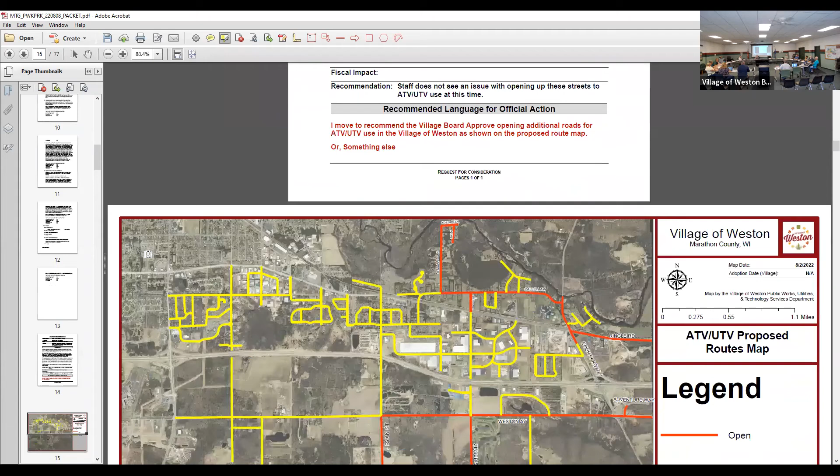So we met with the Rural Riders Club and went through, highlighting parts of the village that they thought would make sense, as well as locations where their club members currently reside. There's a desire to minimize the amount of trailering people would have to do to get to an open road or open trail. I shared this map with Chief Schultz and Captain Aldridge and Rusnick with Everest Metro.

The only real concern currently is, I don't know how to star this, but right now there's no good way to get between Old Costa Lane and Teagan Lane. There is an existing trail there, but it doesn't appear to be on Village of Weston property. So Keith was going to follow up with the individual who owns that land to see if they'd be okay with having it be part of the ATV/UTV trails.

We'd probably have some neighbors in that area to follow up with as well, to make sure they'd be okay with those types of vehicles traversing through there. But Chief Schultz wasn't a big fan of having ATVs on Schofield Ave, with Old Costa Lane, Fuller Street, and Teagan intersections all coming in over that quarter mile stretch. I agree with him, because Schofield Avenue, even Ross Avenue, is the same way, and Fuller Street too. These are very busy roads, and they should stay off of it.

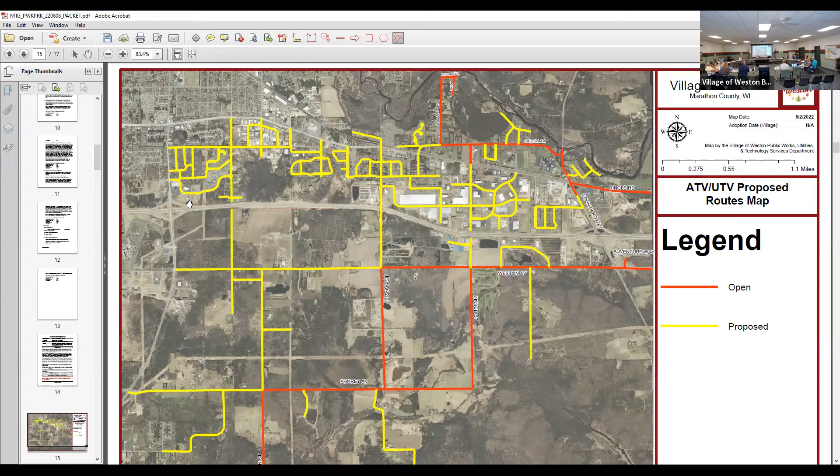So where you were highlighting before, it's hard to see on here, but there is a trail through there, a walking path where people get their bikes and stuff through. Yeah, you'd have neighbors up in arms over that, I think.

But that is used by bikes and walkers a lot. And yeah, it's not that wide, it's just a pretty narrow path, but it's not even village property at the moment, so.

Right. Yeah, well, we wouldn't control that, I did leave a message with the developer on that. Haven't gotten any word back, and we could also get the ATV, UTV club in touch with them, and see if they want some arrangement there, but it's not our call, I guess, on whether that's used for that purpose. I think it would be tough with the way it's placed in there, there's houses on both sides, on either side of that drainage way as well.

I'd have a concern on legal liability for whoever that property owner is anyway. I mean, if he doesn't realize that, I would strongly be against that. It should either be village owned, or I don't think it should even be considered.

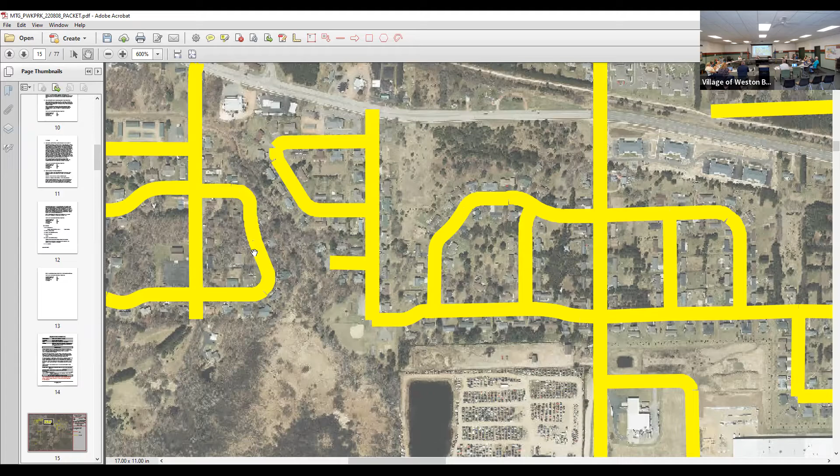Anybody else? One thing I have to comment is I laugh now that one neighbor down in that new subdivision off of Callon there. They should be happy because they were mad because they couldn't get it right at my road there on Willard. They said, well, how come you guys, and I said, hey, I didn't do this, I didn't agree to have it past my house. Now I can get to the recycling, the yard waste site from my house with my UTV.

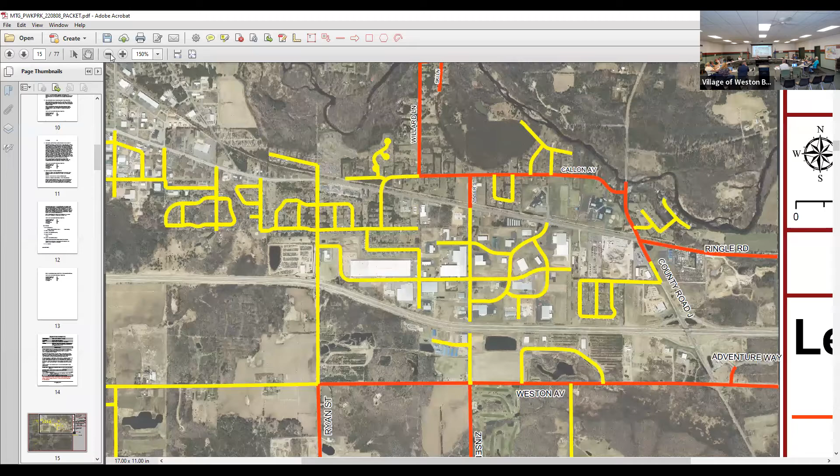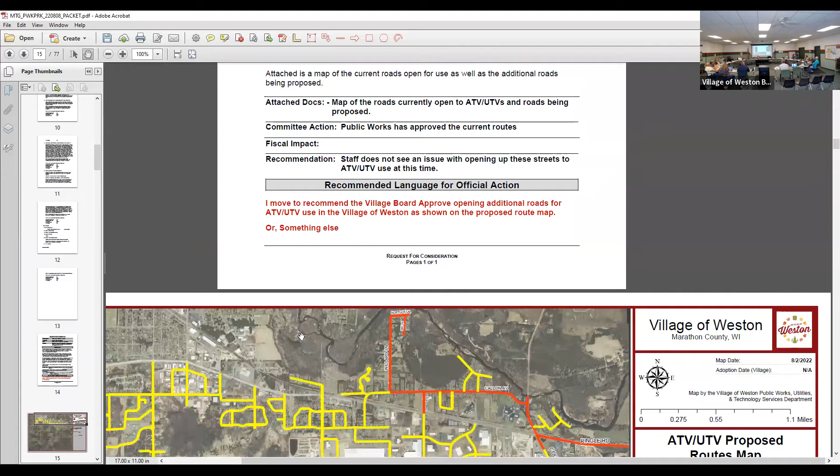Okay, what's your wishes? I'm going to recommend the village board approve opening additional roads for ATV, UTV use in the village of Weston as shown on the proposed route map. Excluding the streets west of, including Old Costa Lane and west of it, south of, north of 29 and west of Old Costa Lane.

Is there a second? I would second that. Question? All in favor signify by saying aye. Aye. Opposed? I have it, thank you.

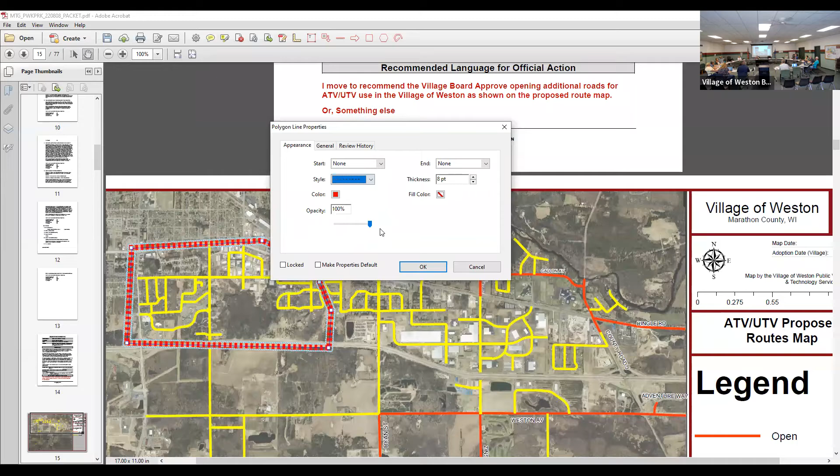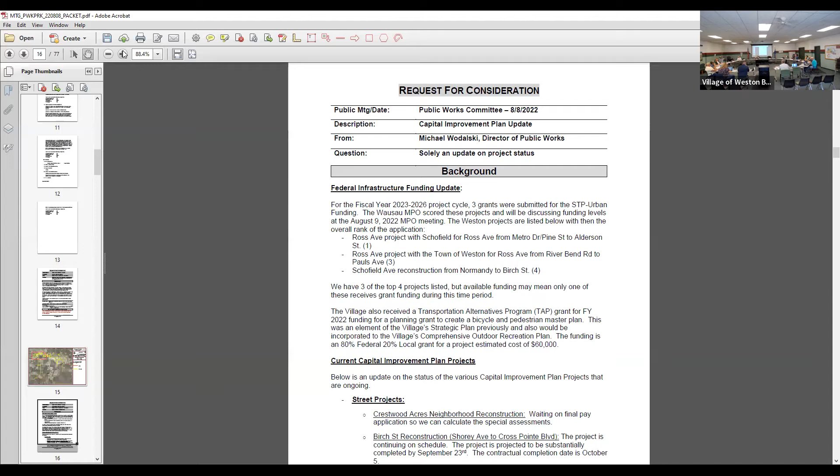The staff report, item A8, CIP update. Yeah, so with the bill, the bipartisan infrastructure law, we had submitted 3 STP urban grants in June.

We got rankings back last month, or last week, I should say. Our joint project with the city of Schofield for Ross Ave from Metro Drive to Alderson Street was ranked number 1. Our project with the town of Weston on Ross Ave from Riverbend to Paul's was ranked number 3. And the reconstruction of Schofield Ave from Normandy to Birch was ranked number 4.

There's an MPO meeting tomorrow to go over funding levels and possibly which of those projects, but at this point, I'd say the Ross Ave project with Schofield is probably getting funded, at least at a 70% level or thereabouts, and we'll have to see about the other 2 as far as if there's enough money allocated this round. Are you going to that meeting, Keith, you going to that?

We'll probably be virtual. But I mean, we did have 3 of the top 4 projects, so I don't think it's a matter of if we get funding, it's just which project and how much will be allocated. We also received a TAP grant for a planning study for a bicycle and pedestrian master plan, that's further on the agenda. That is an 80-20 grant.

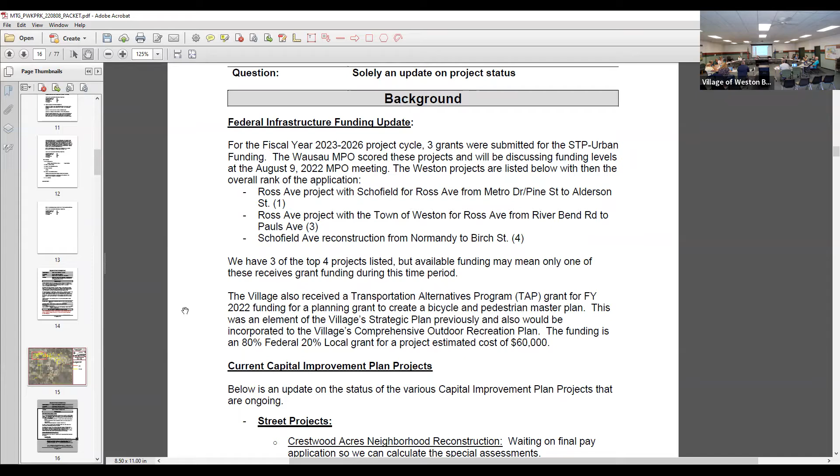The Crestwood project, by all accounts, is complete. We're just waiting for the final pay application so the special assessments can get calculated. Birch Street project, all the water and sewer main are in. Currently working on the storm sewer north of Leyburn and getting the street rebuilt as they move with that project. Some of the curbing went in last week on the west side of the project, and possibly next week they'll get the curbing on the east side of that done. The asphalt path was also paved from Camp Phillips Road, west on Shorey Ave, and then north up to about Leyburn as well, so.

Just a question. Yep. On that bicycle master plan, are you hiring, bidding that project or? We will have to, yeah.

So, the Birch Street project's on schedule to be finished by middle of September.

The Weston Avenue X to J project, I sent out an email on Friday. We received the 60% plans for the west phase last week, so we currently have the 60% plans for the east and west phase in hand.

We had a meeting with the DNR about the wetland disturbance, primarily from Progress Way to J. We'll have a follow-up meeting with them later this week to go over the stormwater, how the stormwater and wetlands interact with each other. Because to achieve stormwater quality, there's a greater wetland disturbance, so we're trying to figure out what is the right balance in between some of that.

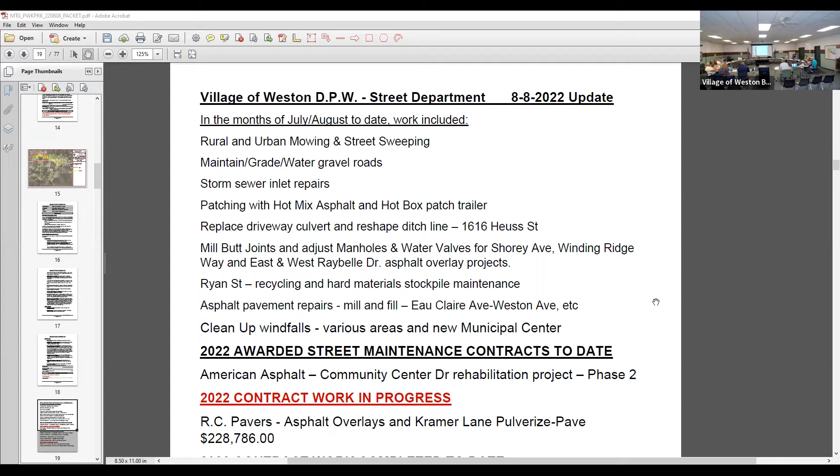Inlets have started to sprout now. When we had 3 inches of rain here several weeks ago, Weston had more than what I had in Kronenwetter, and we're finding some inlets now are starting to show up where it's bad around the pipes and the curb inlets, so we're running into some of them.

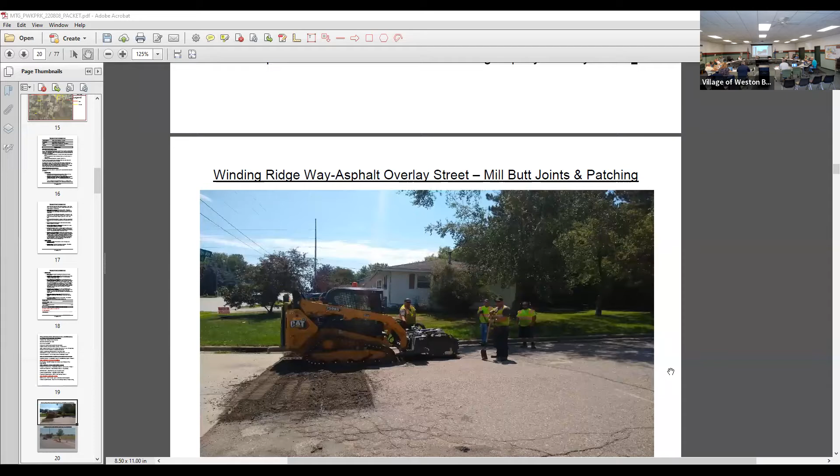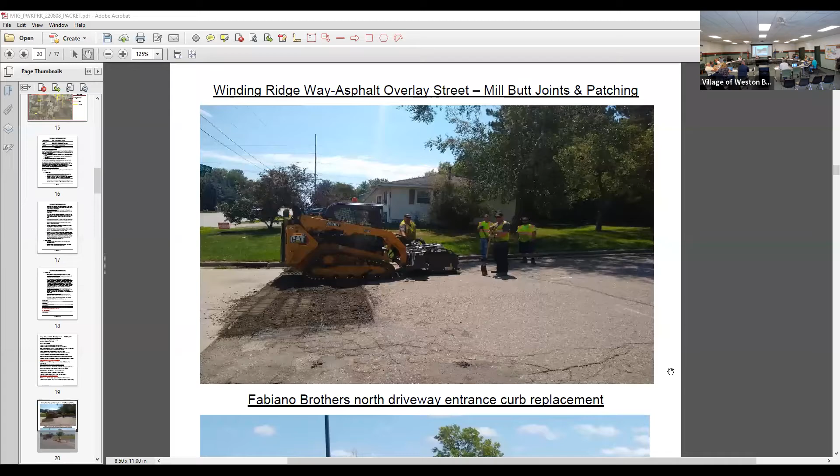Shorey Avenue was paved today. RC Pavers was out there from Alderson to Birch Street, so that's done. The next thing they're gonna tackle will be Kramer Lane - they're gonna pulverize that. So we ended up doing work for that, like Shorey, raising manholes and water valves and stuff.

So the other thing - on Shorey Avenue, some area, I think it was too soft. Did they dig it out or just pave it? When you say too soft, meaning what? The pavement wasn't looking good - it means that spot, that area, wasn't good.

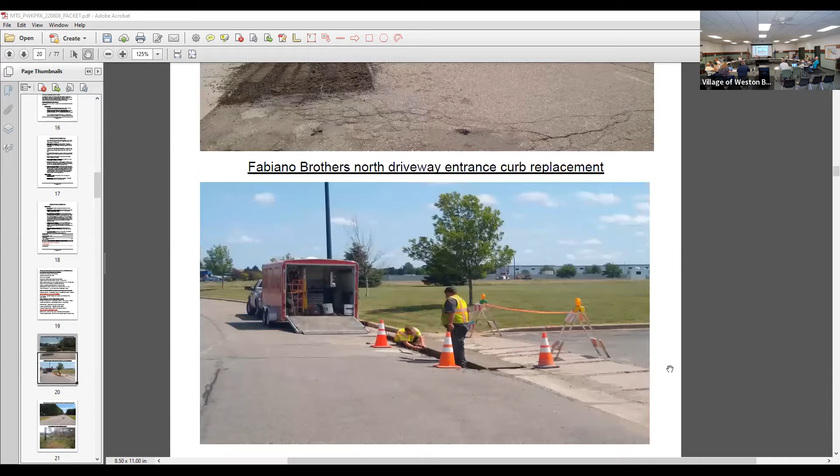So what we did - if you back up on the picture, you'll see we purchased a 2-foot milling head for a skid steer this year. We got the track skid steer. So what the guys did first is they went out there in those areas where it was soft, milled that out, and we've got the hot box patch trailer, which is nice. In fact, we've got hot mix sitting in it right now that we're gonna use tomorrow morning.

So they went out there and addressed the areas where there was a lot of cold patch, milled that out, put hot mix in, rolled it, raised the manholes and the water valves up. So we're gonna continue working on that.

Actually, the city of Wausau is loaning us a piece of equipment that goes on the front of the skid steer so we can mill out longer stretches, drop the asphalt, and it's got movable wings on it so we can screed it off. It works really great. We've got a new roller this year.

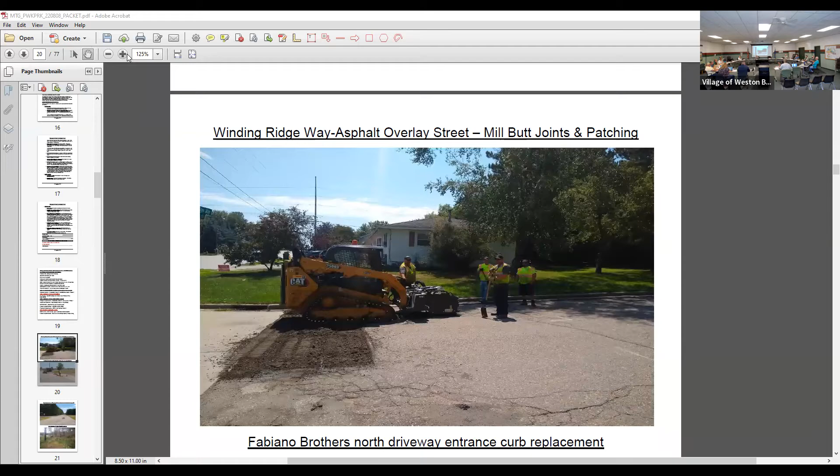So the goal now is we're getting ahead of the paving portions - contracted paving like Shorey, Winding Ridge Way. They fixed that up a little bit. That's gonna get overlaid, and then Kramer will get pulverized and overlaid. But now what we're gonna do is start on like Jelnik, out on Commerce.

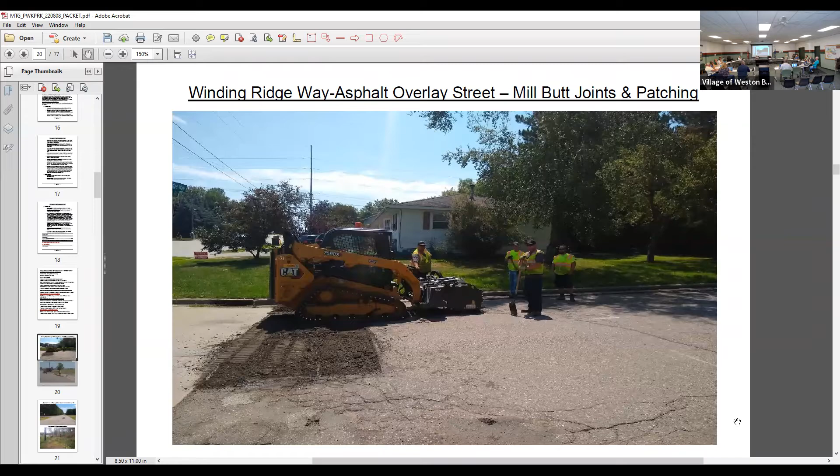There's areas where the asphalt's raveling, so we'll take the skid steer, mill it, then put hot mix back in, roll it. So we're eliminating those soft spots, and it's something we don't have to patch down the line - more of a permanent patch for us. It's cost effective when you look at it versus having to use cold patch that doesn't hold up.

So it works pretty good. Doing some curb replacements too out in the industrial park. There's some areas, Fabiano Brothers commercial entrances, where the curbs were shot. We're gonna do a pour tomorrow, finish the other half of that. That's a picture over on Eau Claire Avenue.

So if you drive down there, you'll see where there were areas that the asphalt was deteriorated, so they milled it out 2 inches, put mix in it. We've got something that'll hold up for a lot longer. So our goal is to try and keep up with that, get as much asphalt work as we can done now while it's warm.

We've got a painter, a spray painter we're borrowing from the village of Kronenwetter for doing crosswalks. We worked out a deal with them to borrow it, so we're going to start getting after some of the crosswalk painting that needs attention, trying to get as much done as we can before the weather changes.

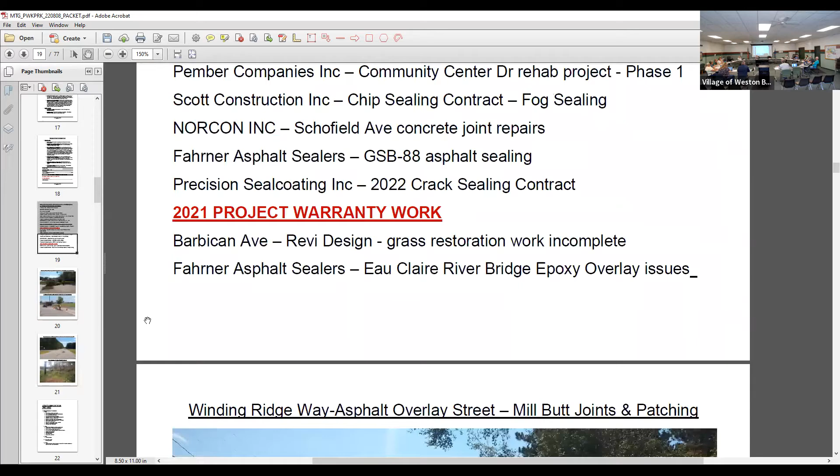Things are going pretty good contract-wise. We cleaned up the trees over by the municipal center, the windfalls, those are all taken care of and gone. When it comes to the contract stuff, hopefully tomorrow or Wednesday, Fahrner's coming back to work on the Eau Claire River Bridge where the low spots were, to epoxy those in and level it up.

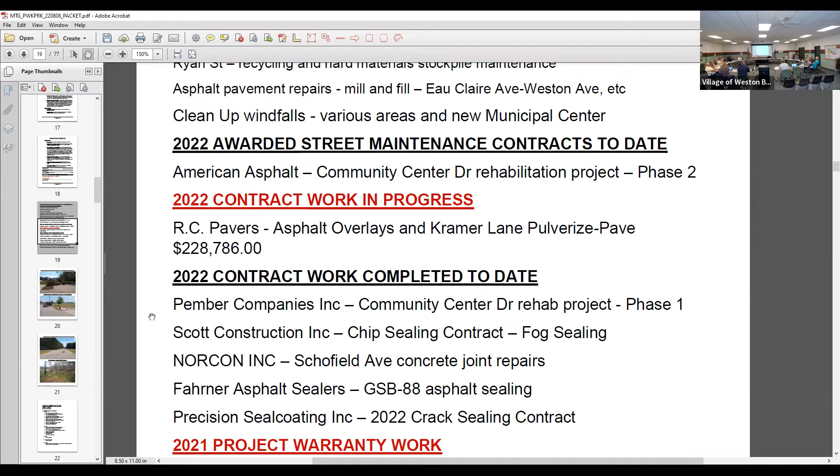Then I've got Portage County coming to paint Ross Avenue. We've got several streets that need painting. Portage County does long line painting for the state and for themselves. We had them paint Schofield Avenue out here and it was a considerable savings, so they're going to come do the painting. That's why Ross Avenue hasn't been striped yet - I'm waiting till they get the bridge epoxy done, then we can come in and paint everything and get it all done. That's the goal with that.

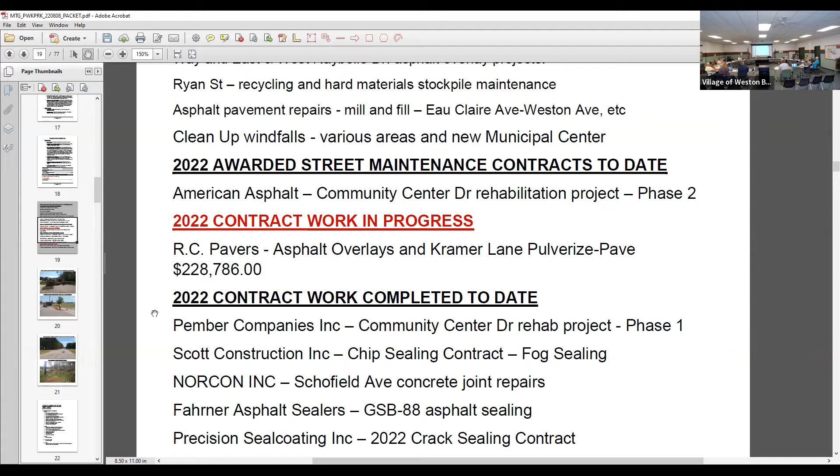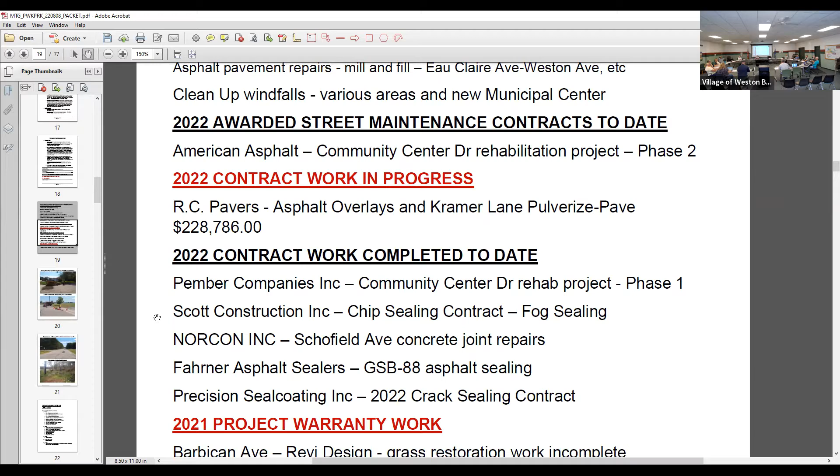On Community Center Drive, that was a two-phase project. Pember Companies finished their work last week, doing all the curb and inlet repairs. Next, American Asphalt is coming in, and they've hired Merrill Sand and Gravel. The last week in August they're planning to start on Community Center Drive, doing manhole and water valve adjustments. When they're done with that, they'll mill the whole thing and then American's going to pave it, so it'll be brand new asphalt from Birch Street all the way to the concrete on County Highway X. RC Pavers still have Kramer Lane and Winding Ridge Way to do, and after that that'll wind up most of our contract work for this year.

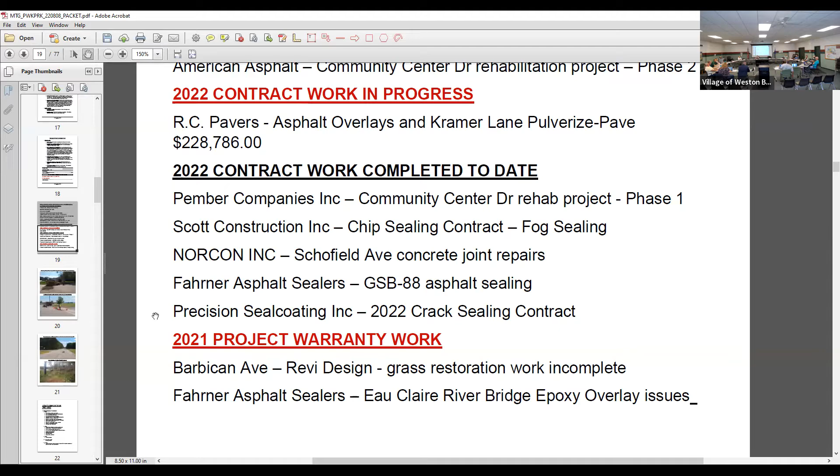Quick question, Dan - when they do the striping on Ross, will they also identify the bike lanes on both sides, the center lane double? Some of those are just gone now. No, what they're going to do is just the long line. We hope to do the special stuff ourselves - that's what happens when you do a paint contract, the long line stuff is pretty cheap when you pay somebody to come in.

So they're only doing the center lane, that's it? Center and fog line, and then we'll take care of whatever else is needed - the bike symbols, we'll take care of those, the white lines where you can walk or bike, and the yellow and white lines too, we'll pay for that.

Excellent. Then my second question, if you don't mind - so Commerce is done and East Everest is done, really nice, right behind Kwik Trip. Am I not saying the road right? Community Center? Well, it's East Everest there, okay.

So what about that washboard - I know it's county road, it's about 300 feet, it's horrible. We're all driving on it constantly. Is there a plan, or can we at least blacktop those?

I talked to Jim Griesbach right at 4 o'clock, because I had a question for their finance person - we can ask them again. I know the joints need to be done. I mean if they're not going to get done until next year, we've got to go blacktop them ourselves, because it's been this whole year.

How about we try calling them again, give some relief to the community. I know it's our dollar, it shouldn't be our dollar, but yet we're all on it. I get a lot of people questioning that, and I know it's county, but they've got to get that done, it's horrible. They did a heck of a job down on Schofield Avenue, and I know it's a band-aid - I remember talking to Keith about it, it's a 5-year band-aid, but at least it's a lot nicer than it was.

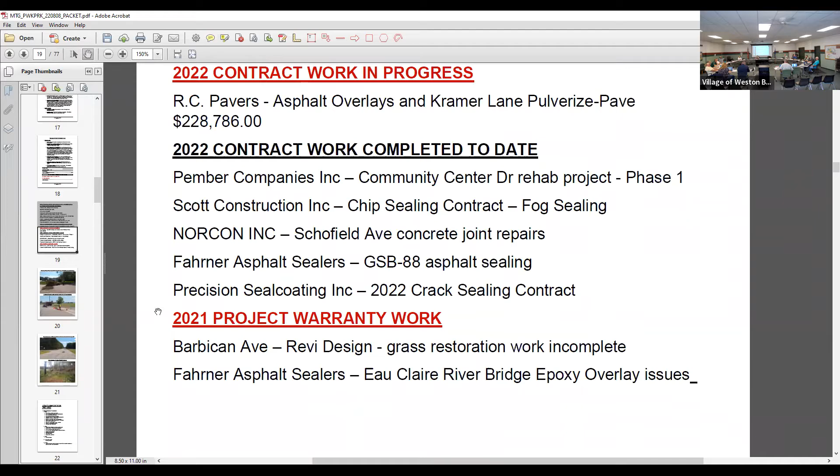Yeah, I think they've got a long-term plan down the line for fixing that whole thing, because the inlets need some work too. They're settling by the inlets. They've got storm sewer issues going on too. But that's our work on our roads. Yeah, but that is our road. No, it is not. That's Marathon County.

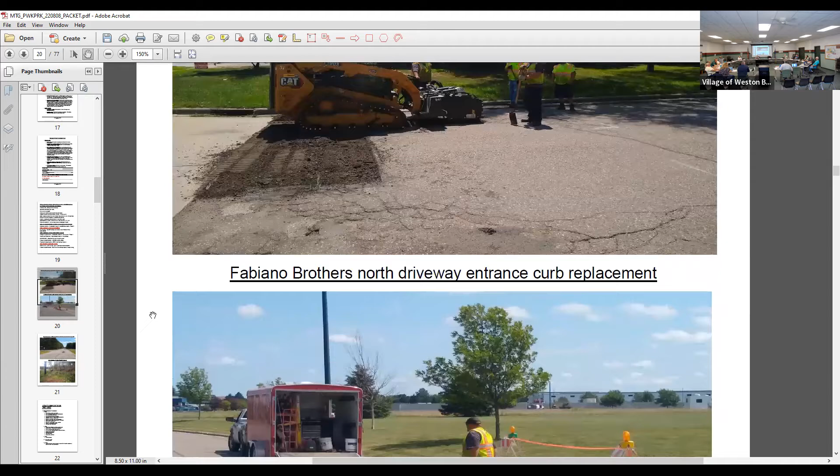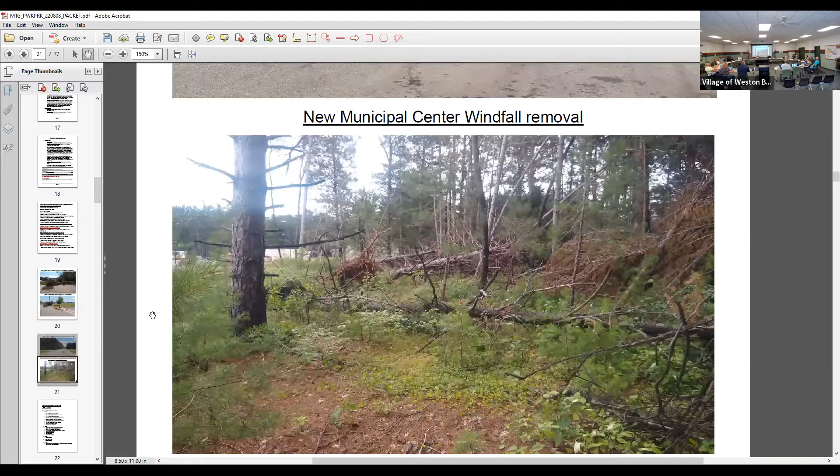Dan, it's my road. I'm on that goddamn road every single day, a couple times, along with everybody else that has to travel. So do I. And it's a washboard. I know, it's not funny. I think my truck's gonna fall apart right there. And then I'll go after the county, but I'm just saying, there should be some relief. A little bit of patching ain't gonna kill us. We'll lean on it. I'm not laughing at you, Mark. I know, just saying, but I get the phone calls, so I'm sure you do too.

Yep. Any question for Dan? All right, thank you. Item 10, the operation update.

On the water side, we had a number of miscellaneous well repairs, some leaks at a few of the wells. Mike has touched on where we're at with our PFAS temporary treatment. Had our meeting with the utility guys, we'll be getting over that way. A few things we need to take a peek at to relocate.

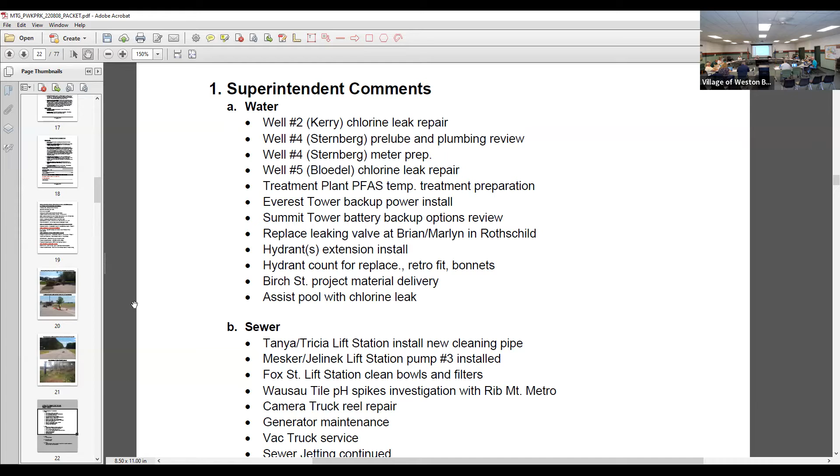Did a few hydrant extensions, assisted on some of the Birch Street project material deliveries as well. On our sewer side, a number of miscellaneous repairs as well. We had a pump that got back to us that was out for repair. We were able to reinstall that over at Mesker Jelinek lift station.

We had some time, we've been working with Rib Mountain Metro. They've been seeing some pH spikes at one of their metering stations. So we had kind of identified who. We've been working with Wausau Tile. They've had some issues with some overflows and some different things that they've been doing. So we've been working with them to keep getting us some data on what they're using.

What is the spike? How much is the pH over? Well, they see kind of a pH spike and they have a metering station that's right outside of Wausau Tile, where that's our final number from that metering station. And then they would have a big flow spike. So we're trying to figure out, the only thing that can really contribute that much of a pH spike we felt was Wausau Tile, because everything else is miles upstream from that metering station.

So they had found that there was a plug, something had gotten plugged and it had overflowed, and it happened to be a manhole that was sitting there that flowed out to it. So they put some different items in place, some other floats. I think now that they know that we're watching and Rib Mountain Metro is watching, Rib Mountain Metro has been sending me all their data. Basically I get it a day late from when they get the results, so they haven't had any pH spikes since. There was kind of a couple hits early in the year, so we were able to finally pinpoint where it was coming from, so they haven't had anything outside of what the ordinance is supposed to be, so they've been staying in line at this point.

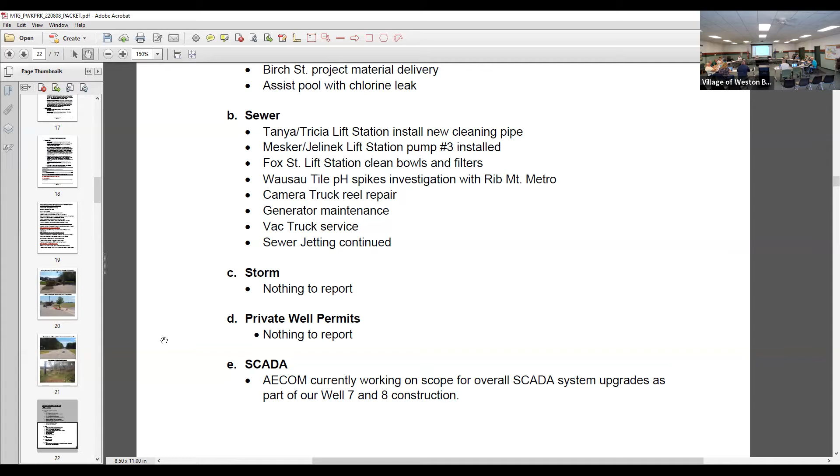Other than that, basically every day we've had two operators out doing sewer jetting. If anyone gets calls, we do have a few instances where it can kind of gurgle up people's toilets if there's some venting issues in the home. We had one home where the water in the toilet blew out, but we try to offer any assistance we can. It's tough to notify where we're gonna be because it's hard to determine how bad certain stretches are until you get to it. The guys spent most of the day on a couple stretches today because it just wasn't cleaning up for them. So it's hard to notify everybody where we're gonna be, but we're continuing on — I think we're halfway through the year's jetting, so hopefully we can keep it going and wrap it up quickly.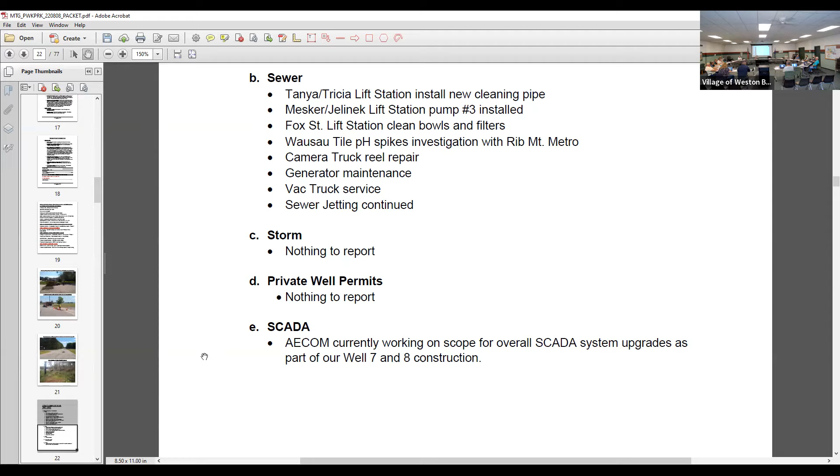Nothing really to report on SCADA, we're still waiting on a couple items. Diggers as usual — there's always a lot of diggers tickets our guys are out doing on a daily basis, along with work orders, a lot of meter installs, communication stuff, and lateral inspections.

I guess in the miscellaneous activities, it's kind of just filled with our PFAS. You can kind of see the timelines of items we've been hitting here in the last couple months.

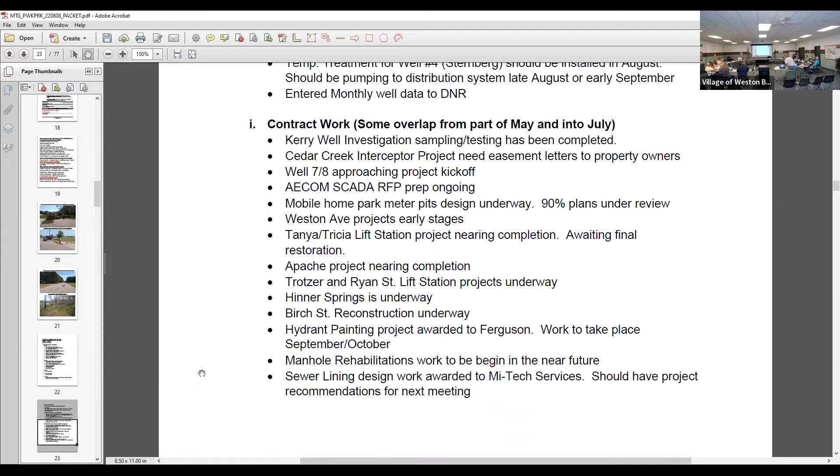And then some of the contract items, Michael touched on most of it. One of them is, I wanted to touch back on the Cedar Creek Interceptor project. I pulled that from the abyss and started reviewing some of the resident letters. Last week I didn't get a chance to get them out, but hopefully we'll get them out this week so we can get that thing back on track.

Our mobile home parks — I reviewed the 90% plan. We should have something agreed upon and ready to put out for advertising soon at the three mobile home parks we have. Our Tanya/Tricia lift station, I believe got paved — I didn't get a chance to get out there to see if it was paved. But that lift station project should just need some final restoration, and I think it should be good. We're waiting on a generator, so we have temporary power that was existing that we kept in place, and we can pull one of our pull-behind generators over there if need be until we get our permanent generator installed.

Other projects — our hydrant painting was awarded to Ferguson, should be taking place in September. I'm gonna follow up with them to get a final number. Our manhole rehabs, I've got to touch base again with Visu Sewer, they should be here this month. Our sewer lining — had more conversations with Mi-Tech last week, there were a couple questions I had, they needed to update a few things, so we should have that, and we should have it awarded, or have a recommendation at the next meeting to award that.

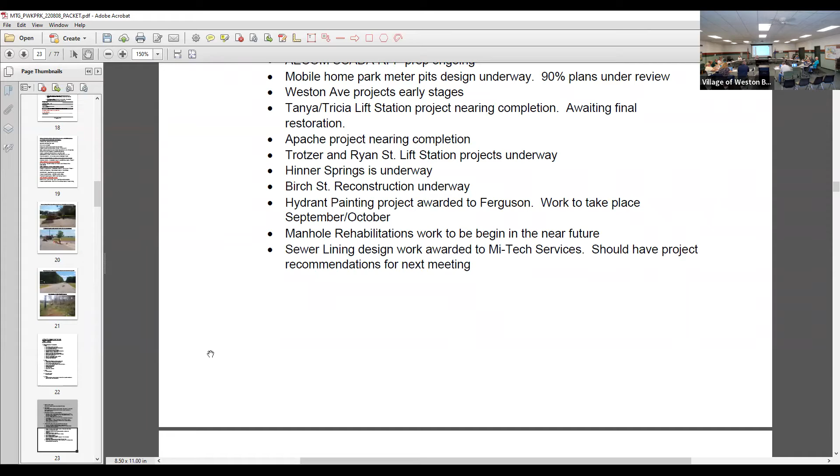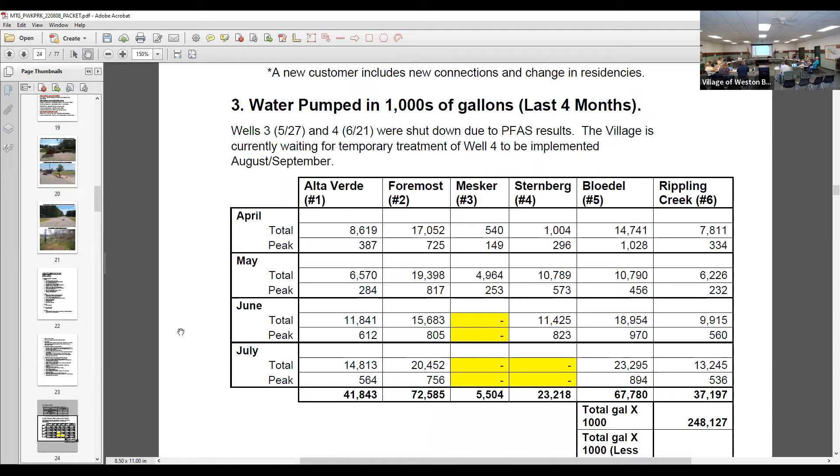Other than that, we have our customer-added water pump data for the last handful of months. You'll notice the yellow, that's our Mesker and Sternberg wells — Mesker's been off the last couple months, Sternberg was off last month and didn't pump anything to the distribution system. Then we just have our lift station operation hours, wastewater flows, and our Aquahawk data. Anything else? That's all I have.

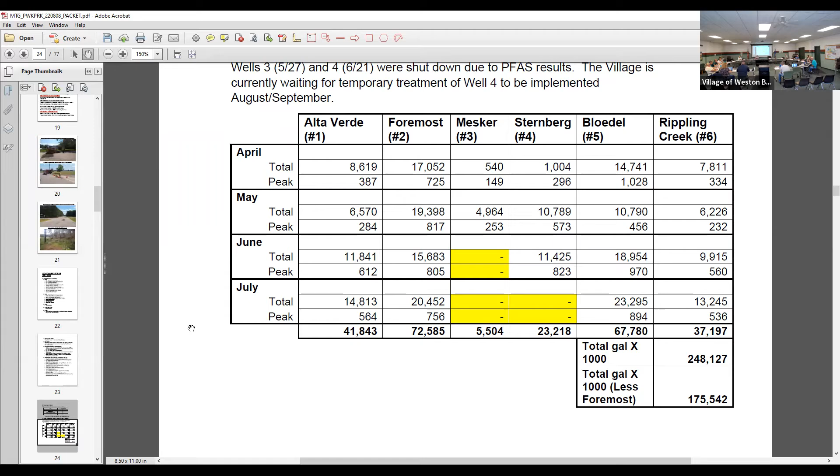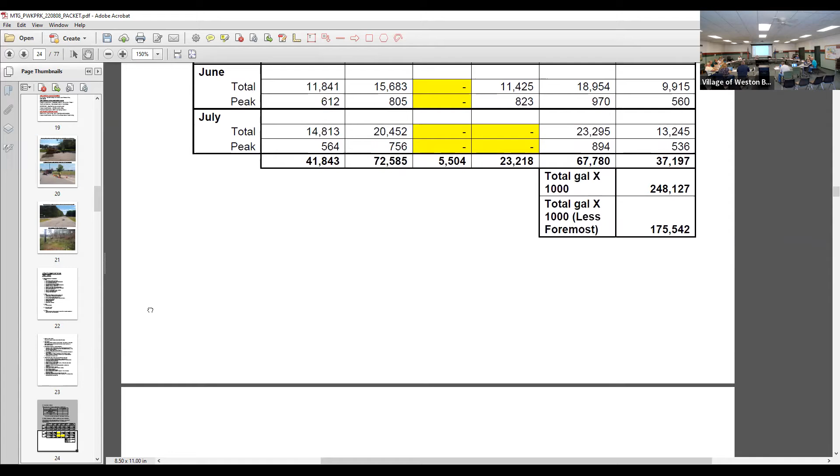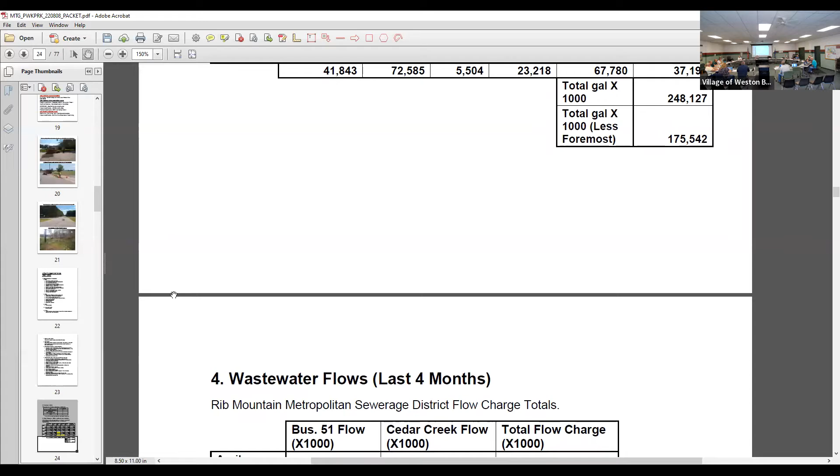How are you coming with that easement for Cedar Creek? Gonna get the letters out and revisit. I know we had a few people, a couple residents that signed off, but that's when the property had changed hands that we were looking at with Szewinski. Anyways, the property changed hands, so we're gonna resend them out, get together, and hopefully by the next meeting we'll either have something signed, or at least an update of what the next step's gonna be. And I've got to follow up with Steph over at Mi-Tech as well.

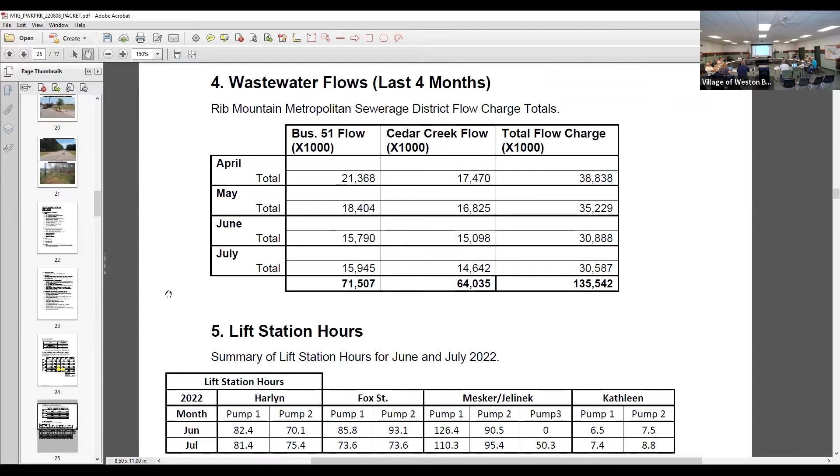Question? All right, Mark?

Just listening along here. Now we have the parks update. I do have a report in the packet that touches on some of our daily activities and some of the larger projects we're working on.

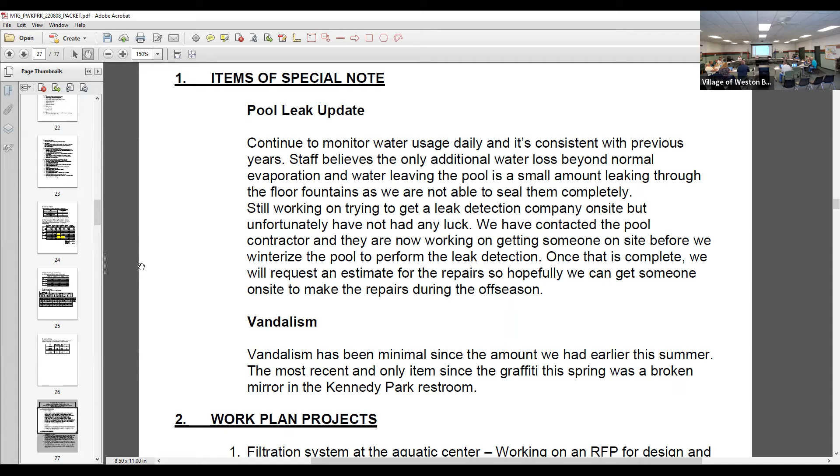I believe I mentioned we actually started on the fencing removal at Kennedy Park today. We got to wrap up our portion as far as removing fence and posts. Security fence is scheduled to come in next week. We also met with them today to go over details, since the person in charge of the project switched from when it was quoted, so he wanted to go over things.

We also met with youth baseball out there, going over what the changes will be and how long it'll take. Basically, they're not usable at this point with no backstops, but they run their fall baseball this fall, so they should be ready to roll. It shouldn't take more than a week or so.

Baseball is also proposing some additional fencing upgrades out there. They requested a couple quotes today, which they'll be discussing at their upcoming board meeting, regarding other fencing upgrades and improvements at Kennedy.

The other thing I probably didn't touch on is our seasonal employees are starting to drop off already as far as the parks ones. We have one that's part-time this week, and another working most of the days this week, but both are transitioning out - one has a full-time teaching job and the other will be student teaching this year, so they're getting classrooms set up and getting ready to head off for that.

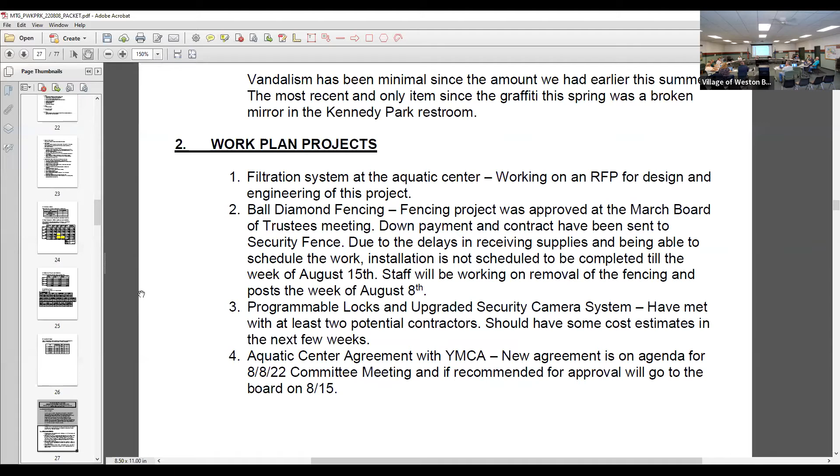I did touch on the leak at the aquatic center. I was struggling with getting American testing over here, so I contacted Newman Pools and now they're working on trying to get somebody up here, because they'd really like to have somebody come on site before we totally winterize the facility, just in case we need to add water to it again for them to test it. Then we'll get an estimate and hopefully get it repaired off season.

Okay, any questions? Sean? No.

Policy discussions and recommendations - I assume this is part of it? Well, this is actually both. Michael had submitted a grant, and he touched on it earlier in the meeting. That's a TAP grant, to cover the bicycle and pedestrian master plan for the village. Got the actual award last week, right? Correct. And now it's up to us to go through the process to draft and send out a bid packet for it, correct? Because it is a... yeah, we'll have to send out a proposal for, I guess, the planning consultant to do the work for us.

It has to follow the DOT process, but I guess step one is we need to accept the grant award, which is the state municipal agreement saying we will do the project and follow through on it. And they will then reimburse us for our costs. Questions on that? How much was the award? The estimated project cost was 60,000 - 48,000 from the state/federal government, and 12,000 would still be the village's share.

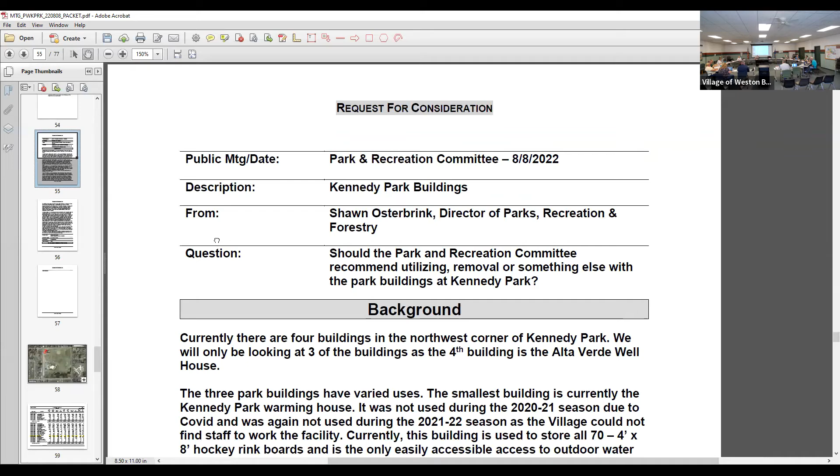So I got a pretty lengthy RFC in there as far as the buildings at Kennedy Park. I know there's been some discussion, obviously pre-construction of the new municipal center, as far as Parks Department staff, everything moving over to the new facility, which is the plan. And then we also had discussions earlier this year regarding Kennedy Park Hall and the use of that.

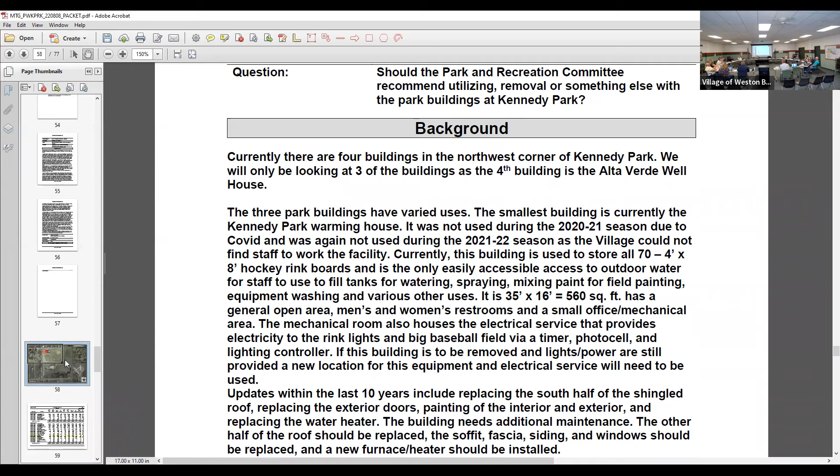If you're not familiar, there's 3 facilities over there. There's the current warming house, the park shop, and then Kennedy Hall with our park offices in it, which is the white and green building. There's also a 4th building, the Alta Verde Well House, which is the gray roof right there. So I broke them apart a little bit due to the different types of use, but also future uses of those facilities.

So as stated in there, I'll start with the warming house. The warming house has not been used the past 2 seasons. 2020 wasn't used due to COVID. 2021, couldn't find the staff to man it. So we just had outdoor rinks with lights on a timer and some benches outside so people could use it through the season. We maintain them basically on a daily basis due to either usage or snow, we have to remove them, et cetera.

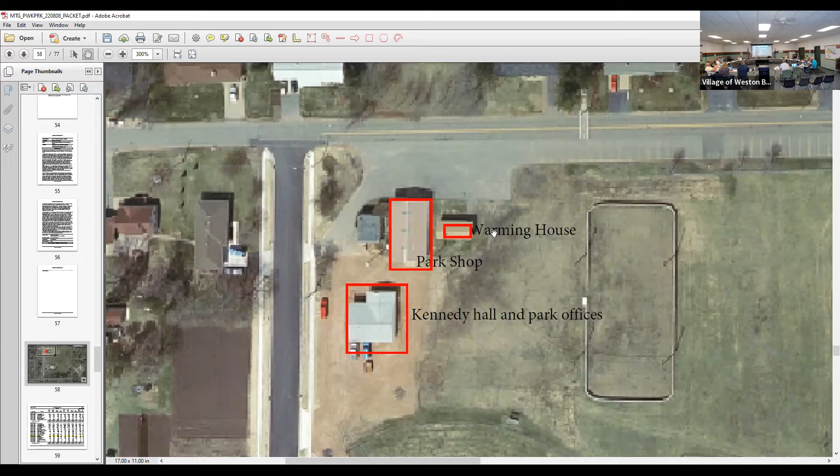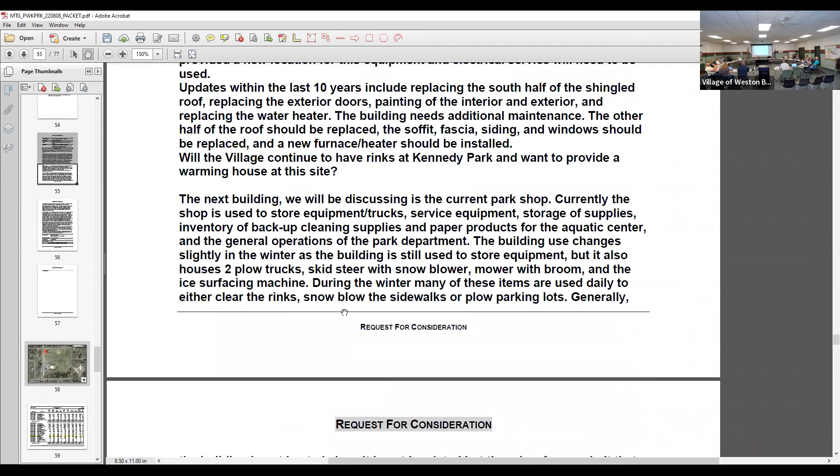So I put in the size of the warming house, I believe it was about 560 square feet. The building has had a few upgrades done to it, as far as part of the roof was replaced, the exterior doors, but it had previously been in our old CIP plan as far as updating it. But with construction of the new municipal center, et cetera, and the Parks Department moving from that site, is there a better alternative as far as the use of those buildings over there, or conversion or removal, et cetera.

And I just touched base on some of the other things. That is also the source of the power and control for the lights on the rinks. Also powers the big baseball field electricity too. So it's one of those things where if we decide to remove that building, then we're going to have to move power and adjust where those things are controlled if you're still providing power for rink lights, et cetera.

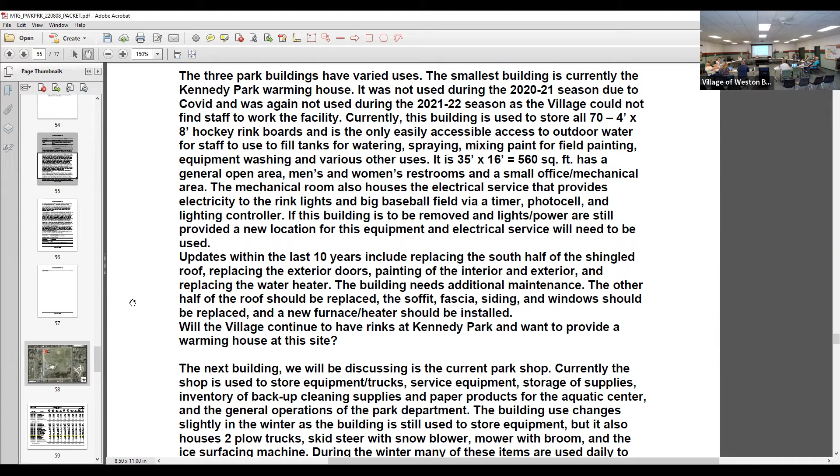Next item is the park shop, which is the largest of the buildings there. Of course it houses the park operations currently, stores most of the equipment, et cetera, trucks. And has a shop area, storage, obviously, and then we have a heated storage area where we store cleaning chemicals, stuff that can't freeze over winter. We also store some equipment in there over winter that can't freeze.

And then we also store backup supplies for the aquatic center. The aquatic center unfortunately doesn't have storage capacity for backup toilet paper, paper towel, cleaning supplies. So that is all stored at that facility also.

So one of the things that just brought this building into the discussion is that if we don't have a facility there for cleaning, for housing like the broom or the snow blower or the Zamboni, we will have to transport those items nearly every day from the other site. So does it make sense to leave it? It could be used for off-site storage from the main municipal center. But there are pieces of equipment that are used on a daily basis because we sweep the rinks, we snow blow the sidewalks at Kennedy, the front of the pool, et cetera.

The Zamboni, if we don't have a place to house it, it's probably best off to get rid of it because transporting that is not realistic. We move it twice a year from Ryan Street, we move it here, we move it back, and it's a pain because it's a large piece of equipment. So just some things to think about. We want to get this discussion started if there's a direction to go with it.

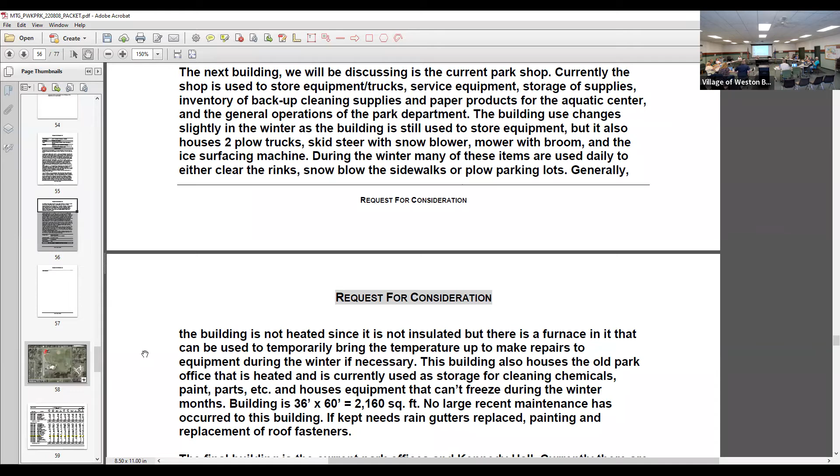And the final building is Kennedy Hall and the 2 park offices. This discussion regarding this building was something we knew was coming back, talked about it in the spring. We decided not to rent it out just because since 2020, the use of the building has changed, so it stopped being used for private rentals.

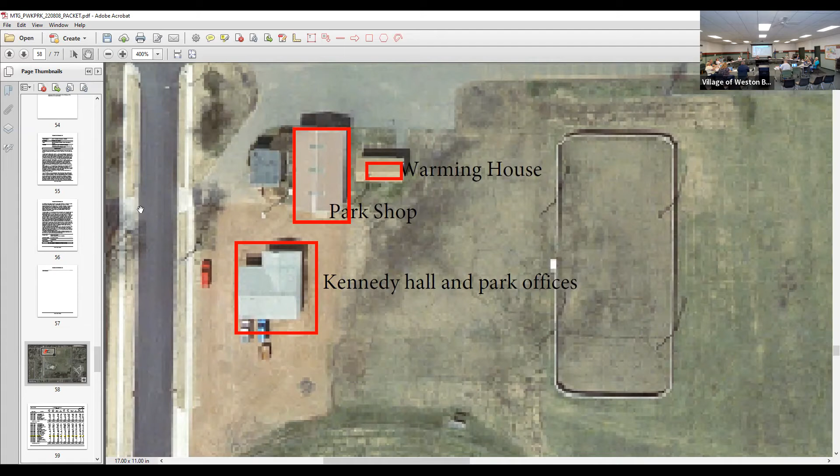We built 30 plexiglass dividers for the elections, those were stored there. We store some other election stuff, like the ice cream machine and slushy machine from the aquatic center, stored there so it doesn't freeze. We also store backup supplies for our aquatic center, chemical pumps, etc, stuff that just can't freeze and we don't have a ton of heated storage.

So with the new facility, some of this stuff can be stored there, no different than us using it as a workspace, because we use it as a workspace for painting right now, refinishing tables, building hockey boards. So obviously those uses don't have to continue there, but what do we do with this building?

I think that's about it. I mean, I wrote quite a bit in the RFC, but I really wanted people to start thinking about what the future of it is.

I'd almost add in the 4th building there too, the Alta Verde well house. That well house is in need of repair, and in our CIP we've talked about having a treatment plant at the Bladel well, where the Alta Verde well house would pump to Bladel Street, and then everything would be treated at Bladel on site. So that building in and of itself could likely be redone or eliminated to a certain extent. I think all of those buildings kind of come into play as we look at what that corner looks like moving forward.

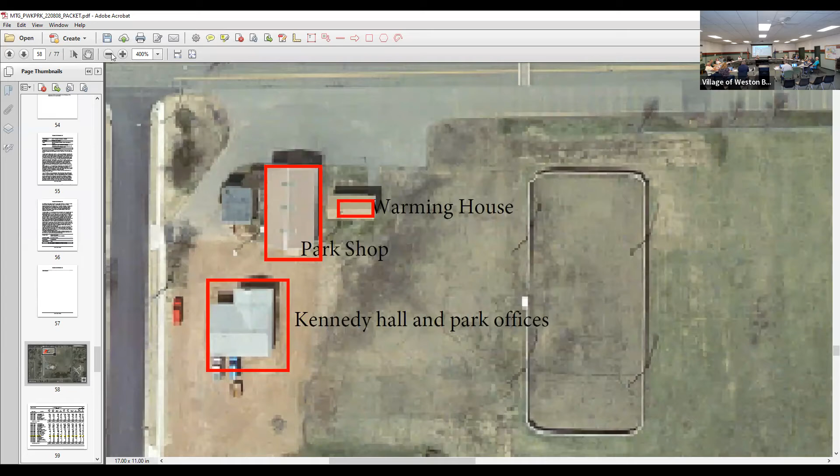And actually, as you bring up, baseball has shown some interest in using Kennedy Park Hall. I had a brief discussion with the vice president last week. They may be interested in leasing that building because they don't have their own site. The baseball group wins trophies, but they don't have a place to keep them because they're not part of the school or somewhere they could store that stuff. So I guess just putting that out there, that there might be another use for it.

We initially had thought that if the warming house is going to be removed, the 2 park offices, that north little section, it's 11.5 by 11 and 11 by 17, only 280 square feet, might have been an option to move the warming house area into it, but it's half the size of it.

And you don't have direct access to the restrooms. We actually go outside the offices, go to the other part of the building to get to the restrooms. So yes, a hole could be put in the wall, but then you have this whole big hall area that's susceptible to lots of people using it, because we've seen our warming house get destroyed on the inside from skate marks and hockey pucks getting shot around and everything else.

Well, to me, it would make sense in a way to have a building where you could keep some of the park stuff that you use almost on a daily basis. Kind of like out by Ryan, where you have some of your equipment in that building because you're using it right there. It would make sense to keep something there that you're not driving back and forth for.

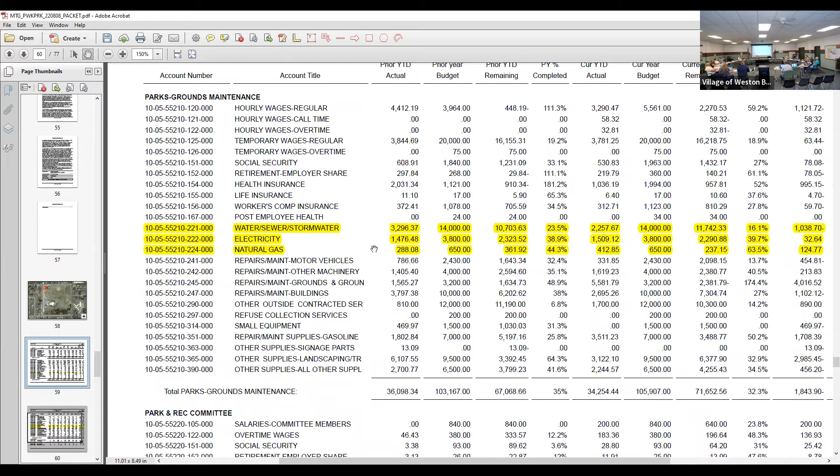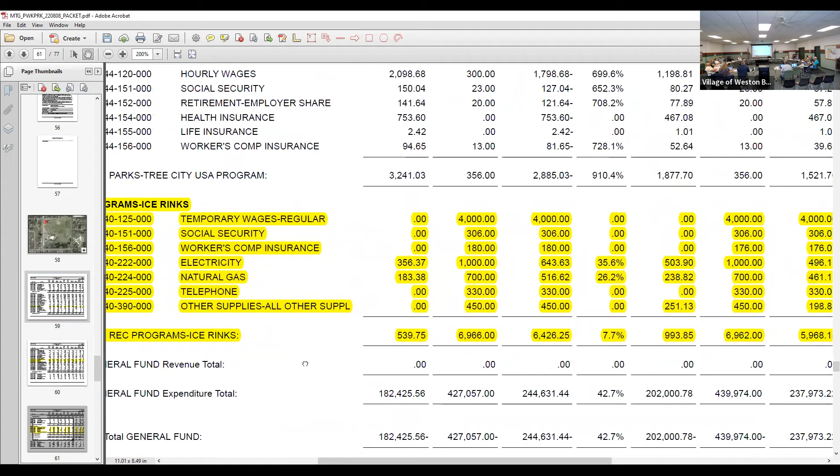I put the budget in there just so you've seen what the budget is for the ice rinks. It's about a $6,000 budget for the season, but there is heat, there is electricity. Most of the expenses are wages, there's over $4,000 in wages typically. Our water, electricity, and natural gas is down at the bottom. There's a separate line for ice rinks. It's not a huge expense, just over $1,100 to $1,700 for electric and natural gas.

But that comes off of the main meter off of the shop too, so it's combined for two buildings.

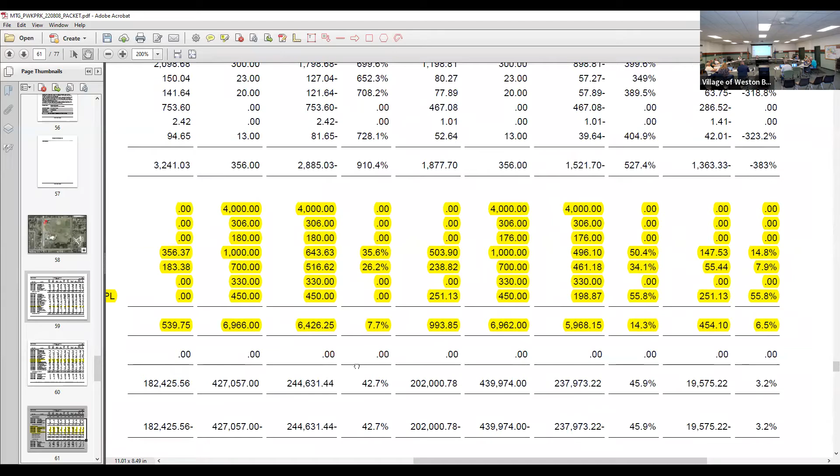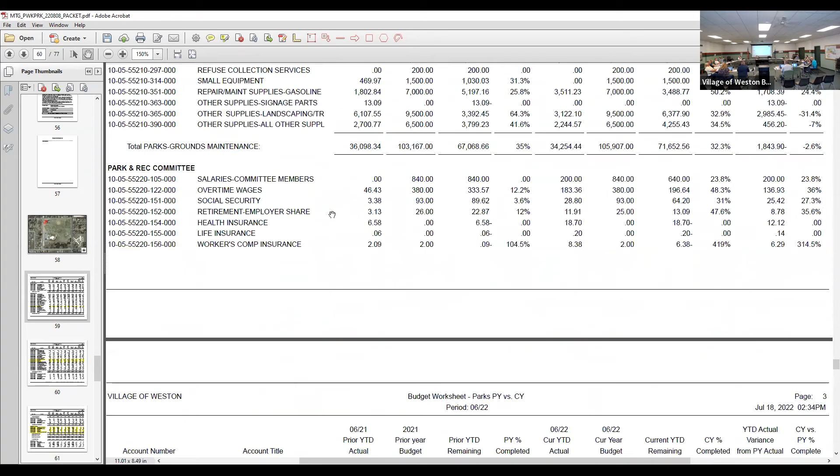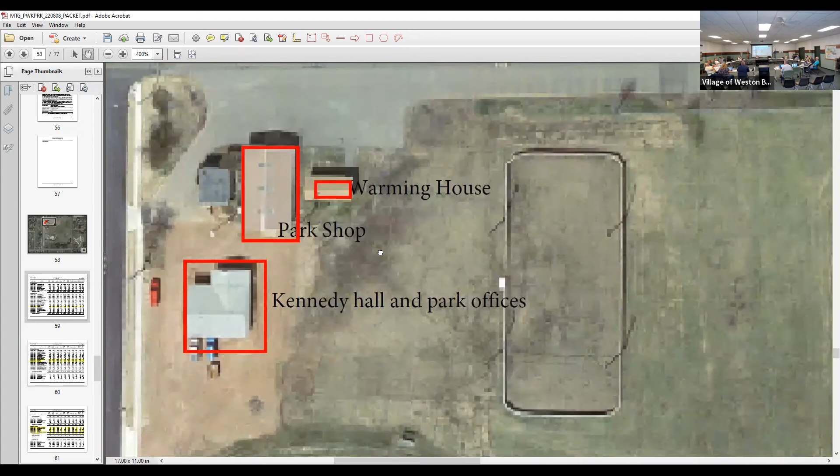Kennedy gets an awful lot of attention, a lot of participation. It's just packed. I'm actually pushing myself to go by it because I made a statement that I don't use the parks, and I'm crazy, I'm like the only person that doesn't use the parks, because Kennedy, we're parking out there, there's tons of cars, there's tents everywhere. It's amazing, it actually puts a smile on my face.

So that's fine. So now go to the warming houses. The 400 block in Wausau gets a lot of skating. They don't have a warming house. They do? Yep. Is it a portable? It's a portable. Oh, it is. Where is it?

On the south end, right near the amphitheater - they have a prefab facility that they put up. It's got electricity and heat in it.

They don't necessarily have an attendant in all their facilities, but they do have somebody who comes and locks it up every day. Just because, obviously, you have a heated building with electricity in the winter, somebody's gonna be using it all night long if it's left open. So they have some expense in that, but they do run multiple shifts too.

That's it, any other comments? It's up to you if you want to take any action on anything, I just wanted to get it out there. That's why it's here so early in August, because we know we're planning on moving the end of September.

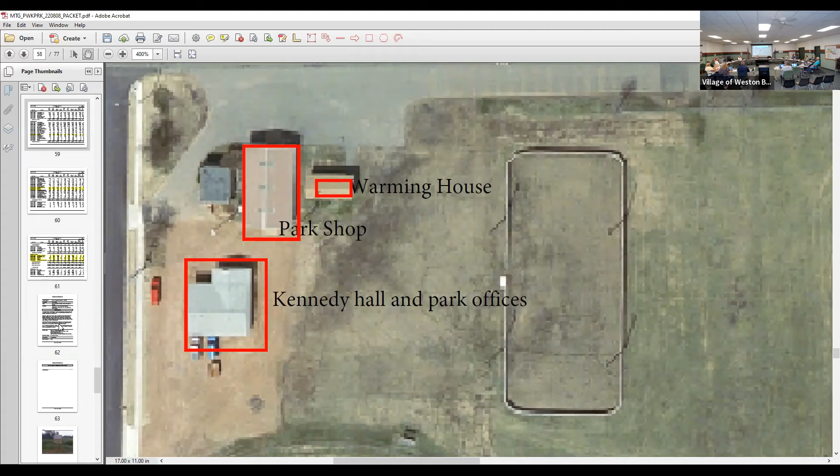Especially if you look at the entryway plan, some of those are different material because you're talking a quarter inch highway grade sign. You can go down to 3/16, I believe, on type 2 as far as thickness. But these are 10-year warranty, as far as the protective covering, no different than the wayfinding signs. Relatively inexpensive - both that sign and the Jaeger Prairie sign were about the same price, both done locally by D&L Signs. That one's actually 5 years old already, the Memorial one was like 2 years old.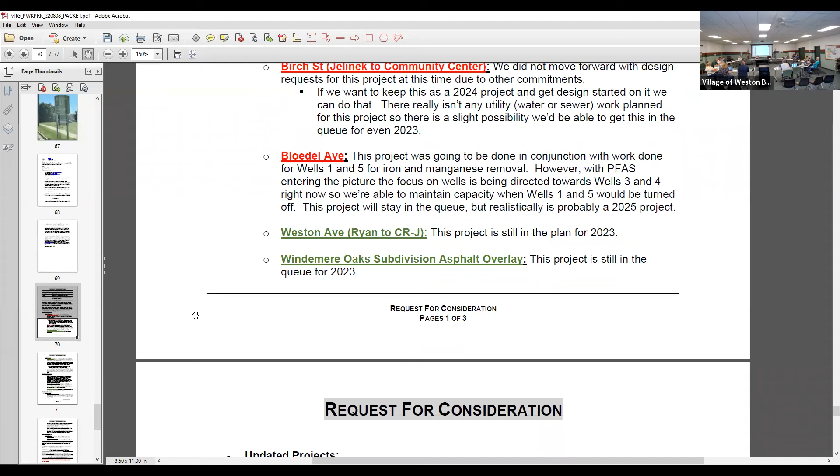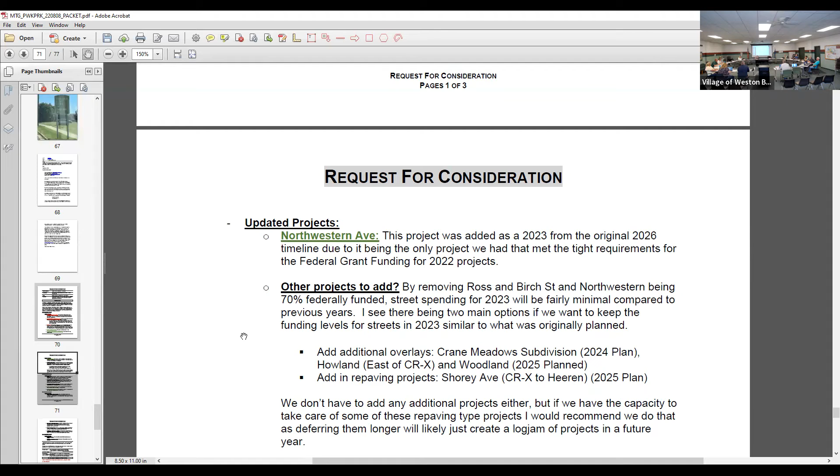But then we did have a project like Northwestern Avenue where we did get funding to sneak into 2023. By removing the Ross Ave and Birch Street project and putting in Northwestern with a grant, we essentially are going from about $1.3 million in general fund expenses to a net of about $150,000, maybe $200,000 in general fund expenses. So what we are expecting to spend versus what we are projected to be spending is at least about a $1 million difference, if not slightly more.

So I guess one of the questions was, do we want to look at adding in some overlays and other repavings from 2024 and beyond into '23, and then plan for that bigger 2024 project—which currently Fuller Street would be that bigger project in that year, kind of like Birch Street is this year—or we had Everest Avenue in that realm, or a 2023 project like Birch Street from Jelinek to Community Center Drive to fill that gap as well.

Before I get too much into this, I believe we sent this out earlier this year, but one part of this discussion is how our state transportation aids—you're not seeing what I'm seeing—our state transportation aids, we get money from the state when we spend money on our roads.

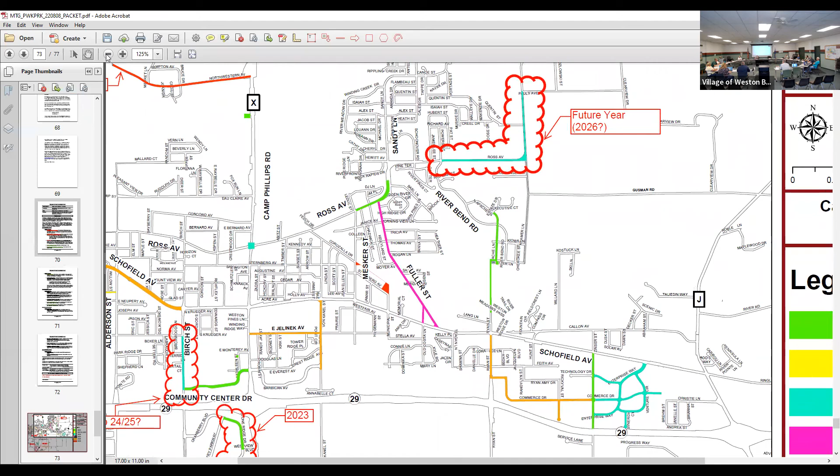Okay, any questions? Yeah, so I guess that's not necessarily an answer, but we have some thoughts on where we might move some projects around.

Like the Ross Avenue joint project up on the northeast side of town, I guess we just keep applying for grants with the town on that, and eventually we should get funding for it.

But then some of our repaving projects, we talk about Shorey Avenue here, or overlaying what's referred to as the Crane Meadows subdivision, or Sand Hill Meadow Park. Those are purple and orange - purple is 2024 and orange is 2025.

So those are a 2024 and a 2025 project that we could do in 2023, since there's not really a lot of engineering and design work that has to go into those types of projects. It's not going to fill that void completely, but I believe that's about $300,000 worth of work that bumps that spending back up a little bit.

So like I said, I believe the thought was at the last meeting that was something you were willing to entertain, but we're running up against the gun on that discussion.

Well, I think if you want to start spending, you need to spend some money, and these are ones where you don't have to do a lot of design work. I would think you want to get it done, because they're already on the CIP plan. And it isn't like it's something you're doing because you want to spend money, it's something that needs to be done. Right, it's already scheduled to go.

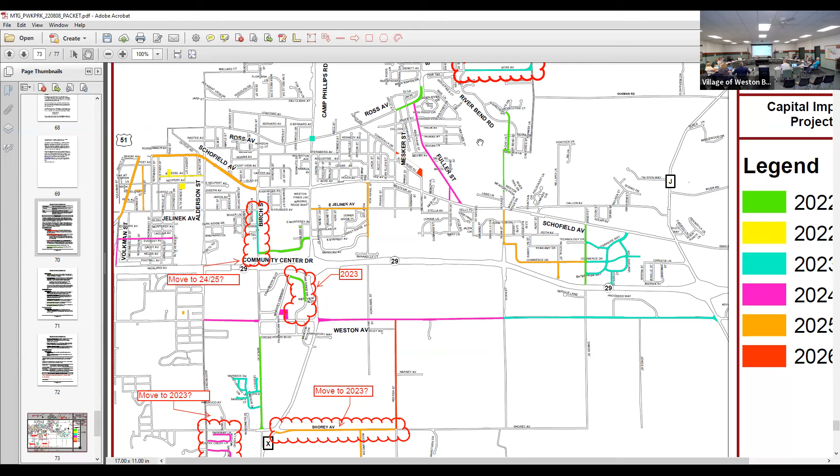So we have a full design year in 2023. Like I said, Fuller Street right in here is one of the projects that was identified initially. We've got Birch Street, just north of Community Center Drive to Jelinek. Everest Avenue, in between the junior high and high school primarily. There's some water utility upgrades to do with that besides just the street.

East Jelinek, every time I drive down that, it seems like it's in worse shape than it was the day before. So those are kind of four of the projects that I personally would see. I don't know if any of you guys have feedback on streets out there that you think should be moved up the list, or that you'd say is your number one priority outside of Weston Avenue. I guess that's the other part, looking at what is that next local road project we take on. I think Fuller is a definite project because it has a lot of traffic.

And then at the intersection of Schofield Avenue, it's difficult to look at. To the west, you don't see enough because you're at the angle sitting in there. So I think that's a must project.

I think it's a lot of pedestrian traffic. I live right off Tricia, and there's people walking all over the place, and there's no sidewalk on any of those streets. A lot of them going down to the dog park and down to Mountain Bay Trail, a lot of bike traffic, so I would agree with that. I would also say, just from a pedestrian standpoint, when I think about the pedestrian traffic, that stretch probably has more than almost any other one out there, right?

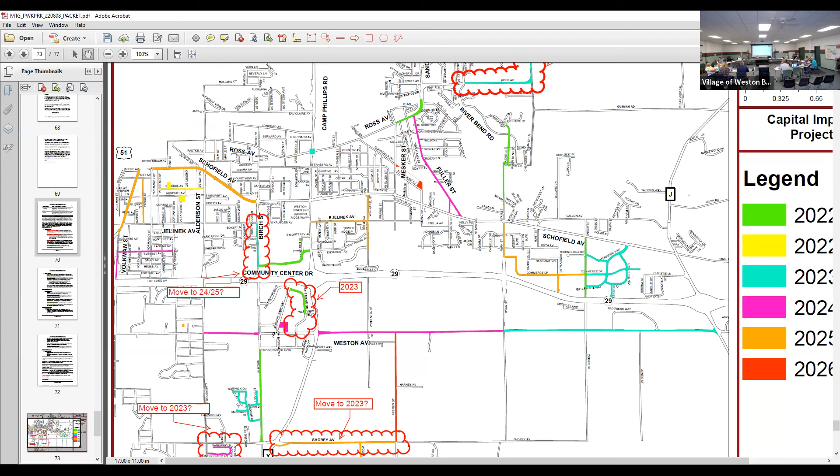The new wells over by Yellow Banks should be completed up here. By getting those two up and running—the initial water quality pumping showed those were of very high quality, similar to well 6, which was our zero PFAS detected well. So we should be continuing to improve the water delivered to our utility customers.

Along the way, the sanitary sewer lining projects are a little more minor, but we'll be taking care of infiltration and inflow issues as we see them too. I know that was a question, what the sequence for water projects looks like, and it's just trying to maintain capacity as well as treat what we have. Seems to make sense to go with wells 3 and 4 right now, then get 1 and 5 after those are up and running again.

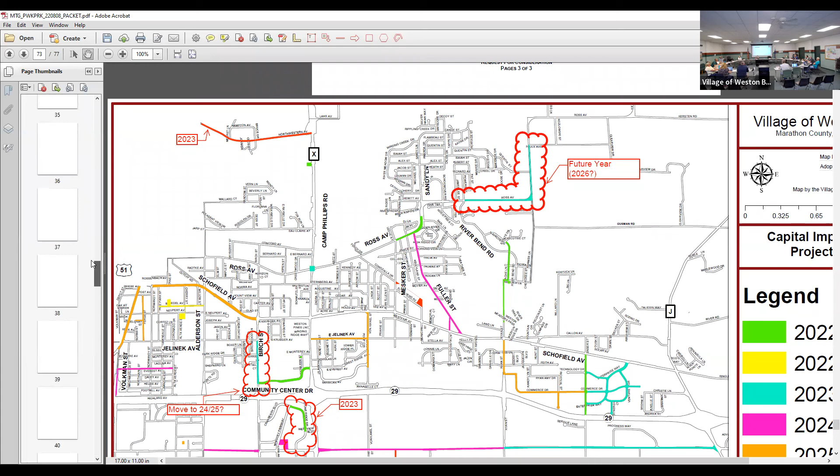Future items: we don't have any future items. Item 15, next meeting dates: Monday, September 12, 2022 at 4:15, that's a regular meeting. And also Monday, October 10th, 2022 at 4:15, that's the regular meeting.

Moving forward, we're figuring there'll be joint meetings unless Sean or I have nothing from one side as far as agenda items. We should have the review of the proposals for the court and the master plans for the September meeting. The deadline is the 31st of August, so we should have proposals by then.